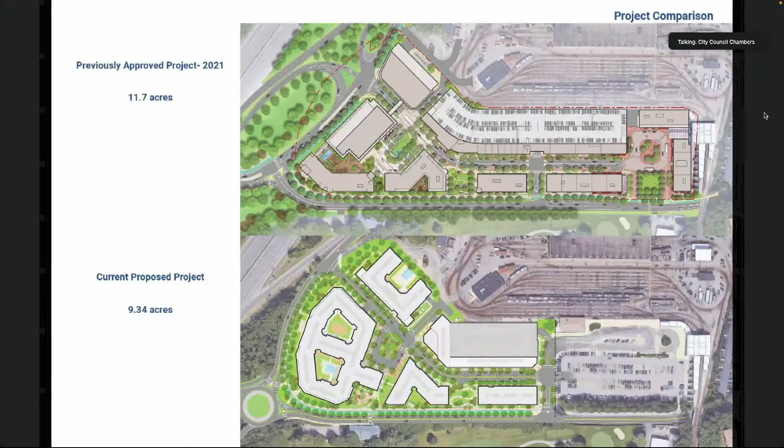I keep going wrong direction. I think I got one more slide. Hold on. There we go.

But we did hear from the community and some councilors that we're currently in a situation in the schools where Williams is under-enrolled, and we're looking to bring more students into the community, and we have acquiesced by bringing in more 2-3 bedrooms than we typically would. So those are just the general metrics of the property in comparison to the last property. I'm going to turn it over now to Rob Adams from Halvorson, who will take you through site access circulation.

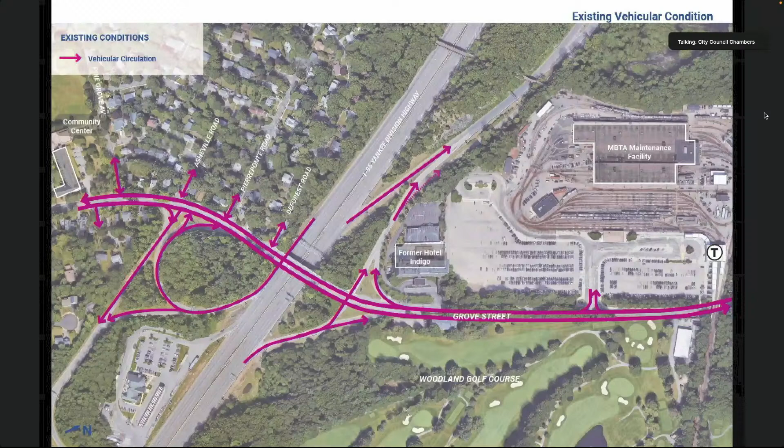So we'll talk about transportation, both vehicular and pedestrian, and then Randy will talk a little bit more granularly about some of the transportation numbers. So this diagram that you see on screen, north is to the right. Obviously, Grove Street runs kind of horizontally across the page, Riverside's at the top, Community Center, Lower Falls to the left. This will be the orientation for all the graphics you see tonight. So this is just a diagram of the existing vehicular circulation as it exists on site. The proposed, sorry, seems to be epidemic tonight.

So the proposed vehicular circulation is shown now on the screen. Introduces two roundabouts, one to the north and one to the south of I-95, maintains Grove Street in its two-way existence, improves the on-ramp to a two-way road that runs east-west from the Rotary to Main Street, and then ultimately connects to the off-ramp of I-95, or the CD road as it's called. And so we won't get into too much detail, but this is the general proposed vehicular circulation.

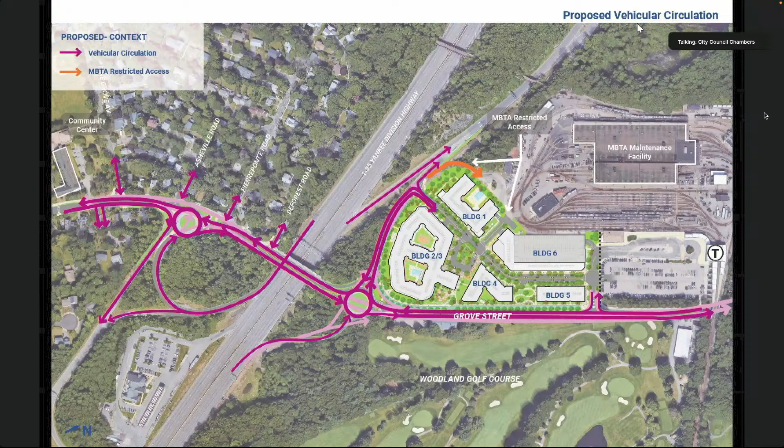The pedestrian circulation, I think, has some more meat on the bones as far as public benefits. Two really important moves. One is the continuous pedestrian circulation from the MBTA site all the way southerly to the community center in a clean and contiguous improved pedestrian corridor. As well as a new pedestrian link to the west to Riverside Park and ultimately the MWRA site. And then obviously some connections from Grove Street onto our site and maintaining all the existing pedestrian connections that exist down in the Lower Falls area.

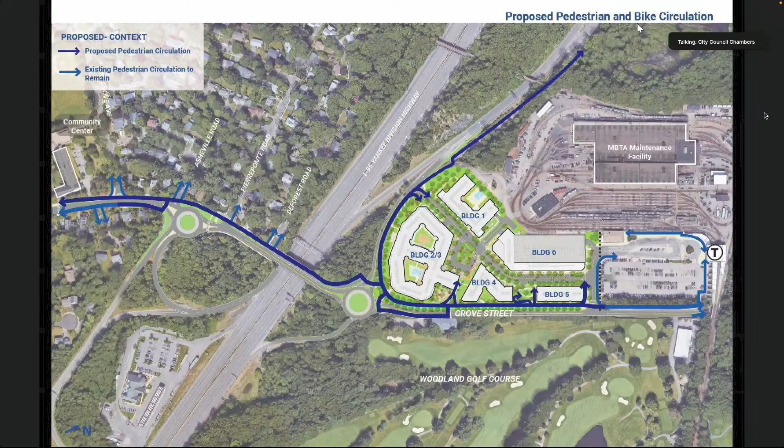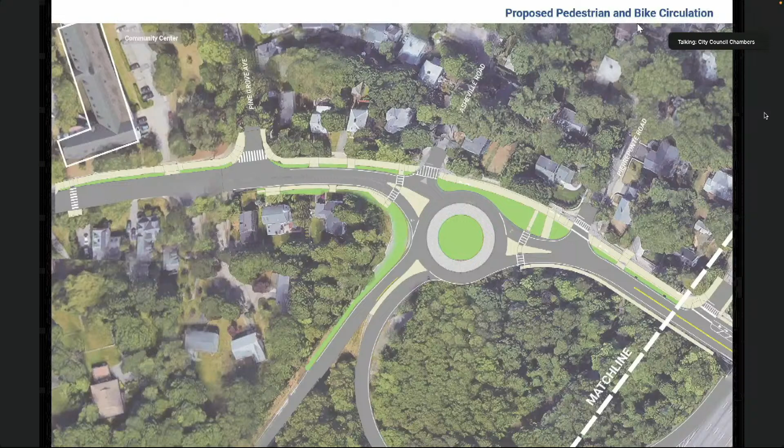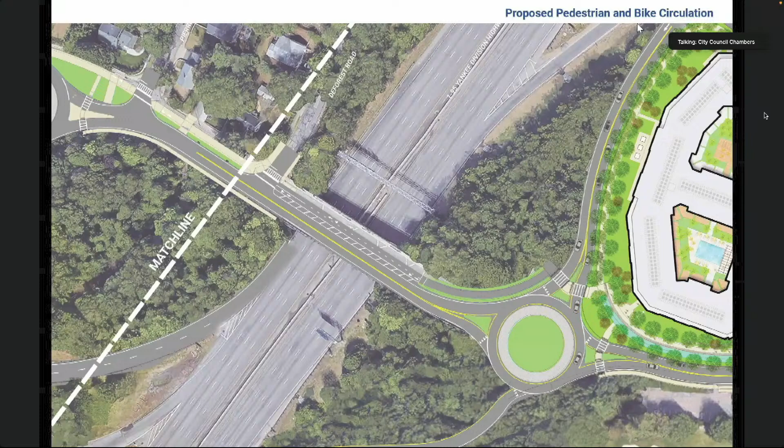Diving a little bit deeper into those pedestrian improvements to the south. So starting at the community center, a new and improved public sidewalk along that western edge of Grove Street, continuing all the way to the bridge overpass. At the bridge overpass, it turns into a protected bike lane, bike facility, as well as a pedestrian sidewalk. And then once you cross, if you're headed northerly, cross the bridge, as you approach the project site, there becomes a protected median, which allows a pedestrian to cross one lane of traffic, find shelter, and then cross the other crosswalk into our site.

And so provides that clean and safe pedestrian connection. On our site, once you get onto the Riverside property itself, heading north on Grove Street, you'll see in more detail, but a separated bike facility and pedestrian sidewalk. As you head west from that roundabout, a shared multi-use path, which ultimately, as I said, connects all the way down to the MWRA site and the regional trail network.

Within our site, we have clean and clear pedestrian corridors, sidewalks, streetscapes along Main Street and some of the secondary streets, as well as some primary connections from Grove Street down into Main Street itself. Just to note, there's a little bit of grade change between Grove Street and Main Street, about 25 feet at its apex, more or less, at that set of stairs between buildings 2 and 3.

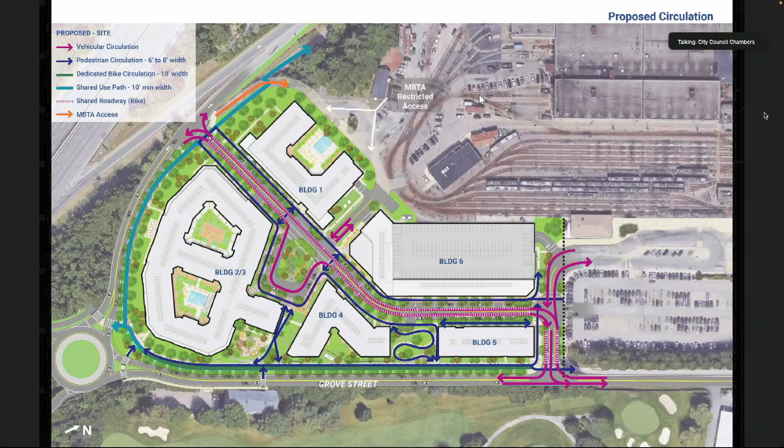And I think that is it for my part. Randy will talk a little bit more granularly about the transportation numbers, and then I'll be back to talk about public realm.

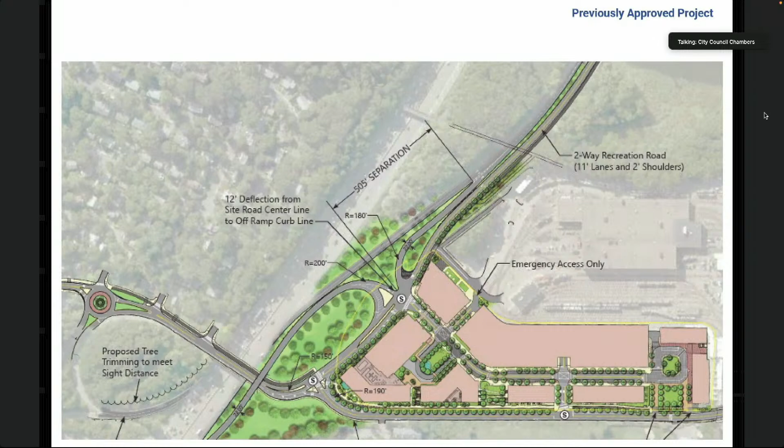So this is just a site plan that shows the proposed project, and it shows basically that we're only developing the western portion of the site. As you come in the driveway today, everything to the left would be redeveloped, but the surface parking for the T to the right will remain as is. We are proposing that access remain as it is, and it would be unsignalized under this plan.

We are also proposing on the far western side of the site a T-type intersection on the access ramp to CD Road. It would become a T-type intersection with stop control on Main Street, which is the internal roadway. And today, if you're headed on the access road to the CD road, or the on-ramp, I guess I call it, it's one way in a northbound direction.

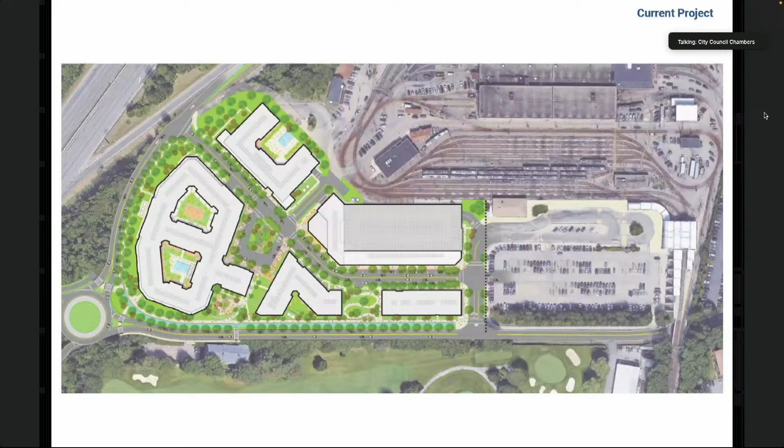Under this proposal, it becomes two-way between Main Street and Grove Street. So you would be allowed to make a left-hand turn out of that intersection and go back to Grove Street under this plan.

So this is a broader view, and it shows the site plan as it did before, but we are also showing what we're proposing at the two 128 ramp terminals with Grove Street. We're proposing modern day roundabouts at both, single lane roundabouts, and that will serve a number of purposes. One, it improves operations at those intersections today.

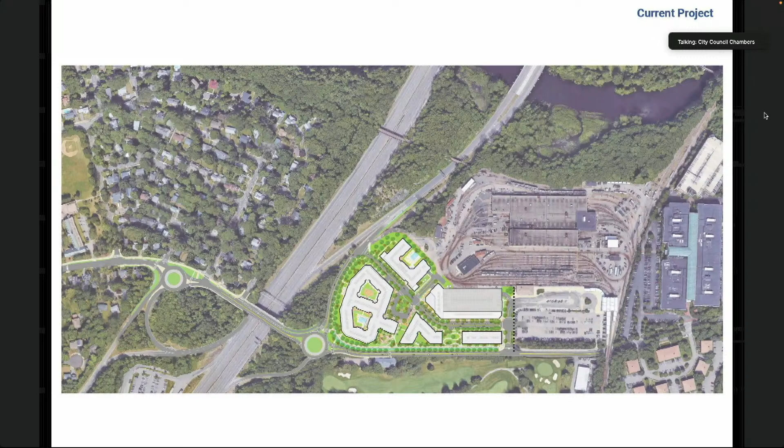It will provide traffic calming, it will provide enhanced safety, and it really is helpful in creating a much better pedestrian and bicycle environment because it slows all traffic down. All movements have to go slow through the roundabouts. So the volume in this area will be much slower than it is. When you couple that with the improvements being proposed to the infrastructure of bike and peds, it really will make an impact.

I'm sorry, I'm just getting coached by my team here.

So my last slide is simple. I wanted to demonstrate to you what the queues would be on the approaches to the roundabouts and also on the driveways as you exit the site. I didn't tell you before, I meant to, but the level of service that we see in the future build condition during both the morning and afternoon critical commuter peak hour periods is a level of service A at the southbound roundabout, which is the best it can be.

That's during the worst time, the commuter peak hour in the afternoon, which is our busiest. And then it's a level of service B at the northbound roundabout during those two commuter peak hour periods. So really good operations with this project in place and the plan for improvements.

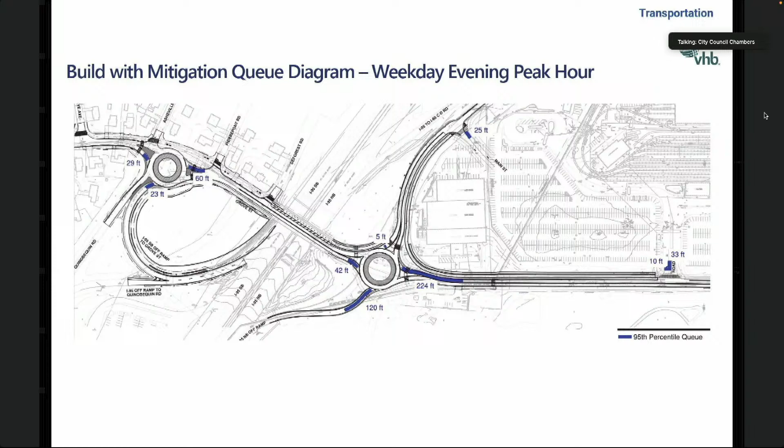Okay, Rob Adams again. I'm going to drill down a little bit more into the site design, specifically some of the numbers. This is really brief. Smaller site, but our percentages for open space, beneficial open space, exceed the percentages from the prior approved project. There's really a network that we've created. We'll talk about it in a little bit more detail. There's a lot to talk about. Again, I'm going to stay at a very high level.

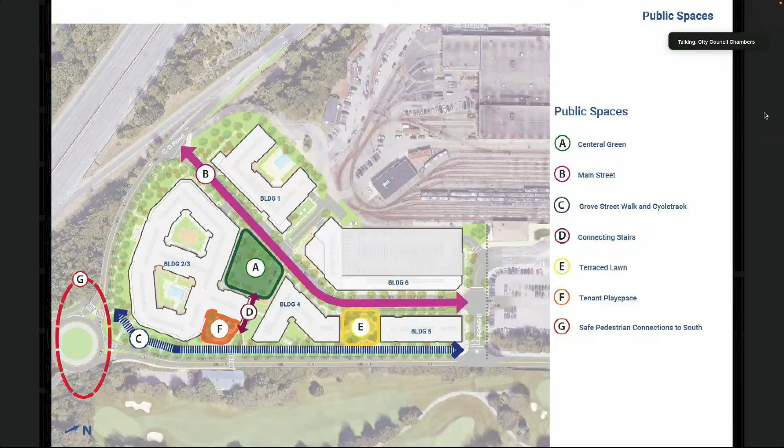Primary focus, as we talked about, is positive pedestrian circulation, making this a walkable, livable environment, creating some key open space moments along that, providing some multimodal transportation opportunities. And as Randy talked about, the improvements at the right of way. So we'll go through each one of these spaces and give you just a little bit of flavor as to what they are.

At the end, we've made some developments in the last couple of weeks, and we'll get to some of the work that we've been doing most recently as well. So the central green, as we've seen in the slide earlier, that A area is really the heart of the development.

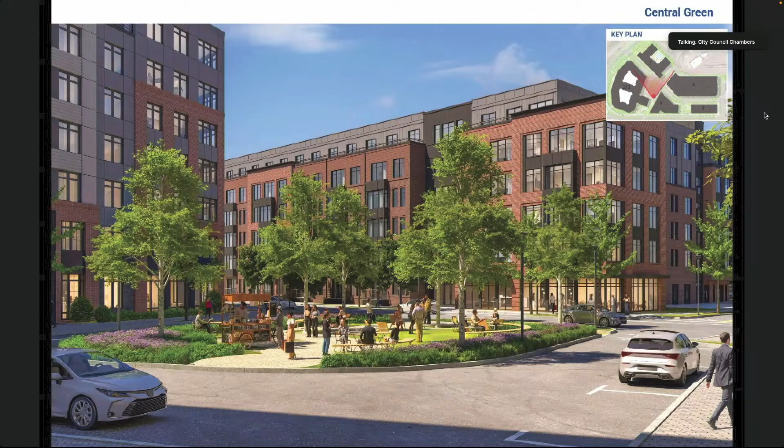A passive green open space with residential, and you'll see in a little bit some new retail and civic space being introduced at the ground level to really help activate this place as a programmable kind of active area.

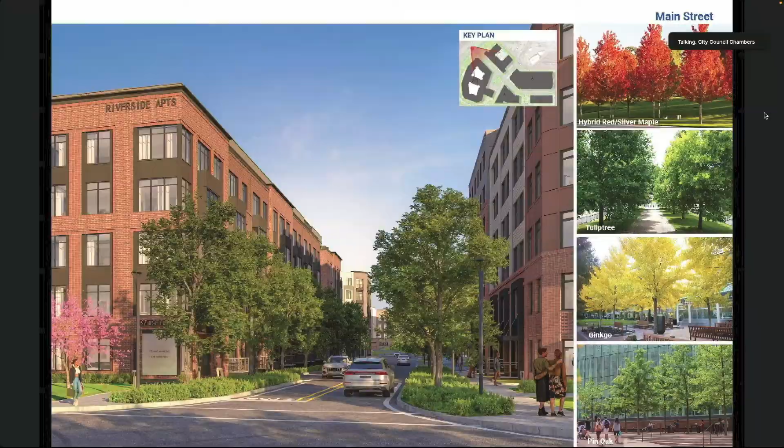Main Street itself, focusing again on pedestrian realm, clear open sidewalks, treeways along the back of curb, large shade trees, as we've all experienced this summer. Healthy shade trees are such a benefit to the community and to the individuals. And so really looking at native species, a variety of species, multiple colors, providing a variety of plants to reduce any sort of monoculture.

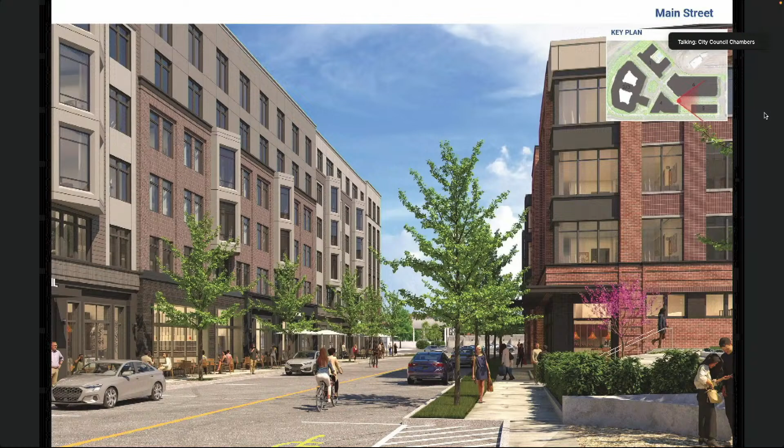Also thinking about the ground floor retail experience, you'll see in some of these slides where we've located ground floor retail and created ample cafe zones and ample sidewalk to support the spill out of ground floor uses along Main Street. And as you'll see on that side, that central green area in a little bit.

Grove Street itself, there's been a lot of conversation about that. Grove Street will remain in its existing width, doing some restriping to help organize that, providing a treeway along the back of curb, a protected cycle track on the other side of the treeway, buffer, and then a pedestrian corridor, which then provides us an ample planted buffer up to building 4 and 5 along Grove Street.

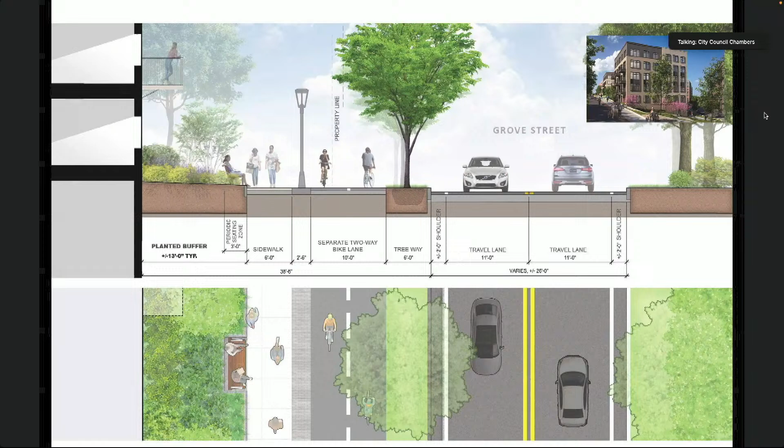Lastly, 2 areas that we want to talk about a little bit more, the open spaces that we identified in the first plan, and we'll talk about again a little bit more later. On the left is a tenant-provided play space, kind of in the crux there of building 2 and 3 and 4 up at the higher Grove Street elevation. Grade change falls away a little bit, and so we're able to, I think, nicely nestle this play space into that area, provide a little bit of grade change so it feels separated from Grove Street, provide adequate fencing and enclosures, but also provide a great amenity for the community.

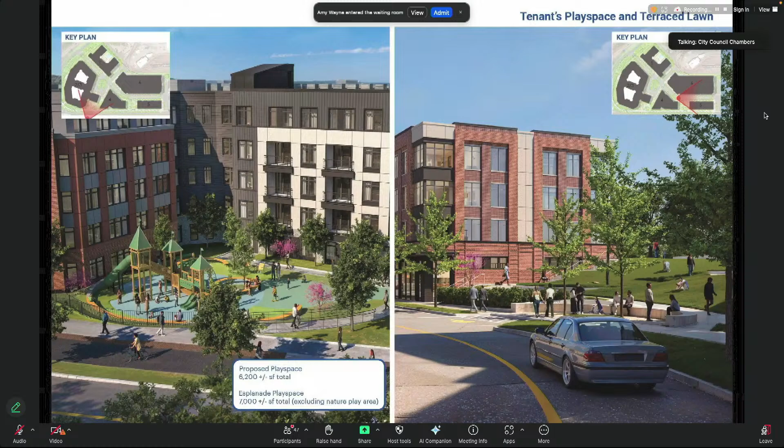Not only when we all talk about community, the tenants and the residents of this place will soon be future community, and so providing that amenity for the tenants of this development.

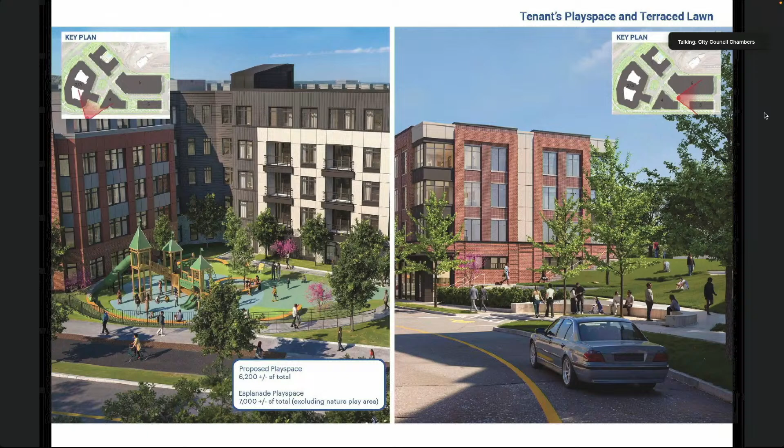On the right, you can see one of the other areas of these pocket parks or right-size social spaces that we've created. There's, as mentioned, the 25-ish foot grade change that moves from Grove Street on the upper right down to Main Street on the left. And so creating a series of lawn terraces to create some social spaces with some more active seating just off the back of the sidewalks, both at Main Street and at Grove Street.

Lastly, we'd be remiss if we didn't talk about it. We are very conscious of it. All of our efforts are around best practices around water management. And so protecting natural resources, obviously a comprehensive soil management plan, erosion plan, but also water quality methods, water management methods that are about water quality as well as quantity. And Rich Holworth is here from VHB to talk about that if there's any more details and any more questions.

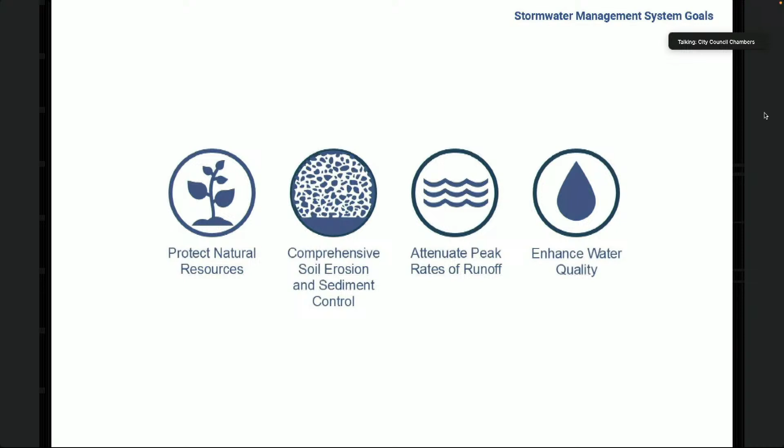So with that, I'll turn it over to Michael. And at the very end, we can share some of the work that we've done in the last couple of weeks to respond to some of the recent meetings and peer review comments. Thank you.

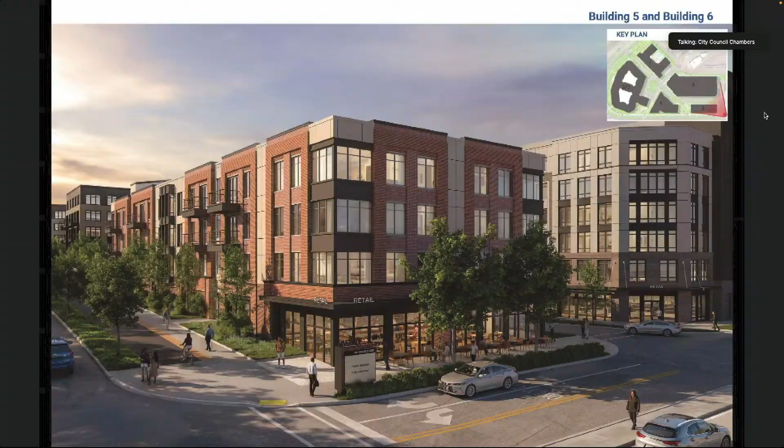Thank you, Rob. My name is Michael Lawson. I'm a principal with Manoa Wasco Architects and Planners, and we specialize in multifamily mixed-use developments throughout the Northeast. And I'm really excited to present the architecture of Riverside to you all tonight. A lot of the themes that you're going to see in terms of the architecture also flow through the open spaces and the site design that we've come up with.

And you heard a lot about the pocket parks and the space making and the place making that we've created on site from Rob Adams. And you'll see here how we're then interacting and creating a cohesive new neighborhood for the site. So I'm going to be taking you around the site along Grove Street and then along our new Main Street as I show you new images and views of our proposed project.

So this is the entry into the project, closest to the train station, the MBTA station, and how you would mainly enter into the site. Here you can see that on the ground floor, we've activated the buildings with extensive layers of retail that have really large open storefront areas. And this happens along the Main Street as you get a glimpse of that as you turn around, but also it was very important to activate this corner as you come into the site.

As you go up Grove Street, we have, as I said before, these pockets of green space and pockets of public open space that kind of create a really great rhythm as we go up and down Grove Street and up and down Main Street. And you can see how the building architecture interacts with the improved pedestrian and bicycle improvements along Grove Street, as well as the different architectural features that we have on the buildings.

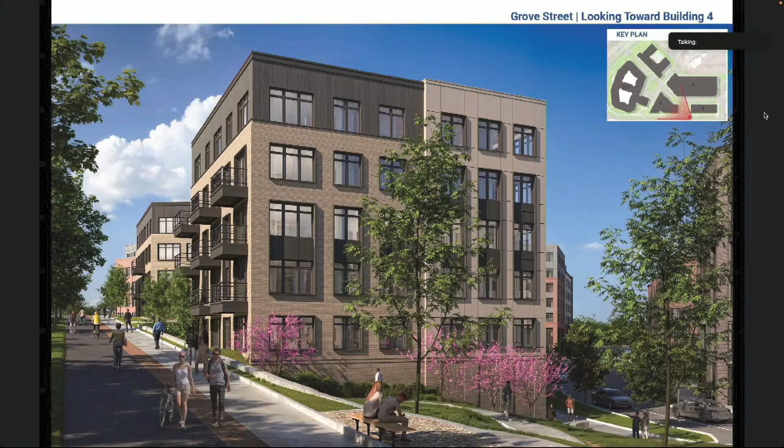We've really created and looked at how the building architecture cohesively and consistently is brought together with each of the uniquely designed buildings. And this includes a palette of materials that includes brick, different varieties of fiber cement panel, architectural storefront, and some areas where we really accent the windows with balconies and bay windows as well. Here you can see that we've created entry points. This is at the roundabout, as well as different breaks in the building to break up the massing of the building with step backs in different locations.

Mr. Lawson, I've had a request, and this is for everyone, that if and when it's relevant, if you can use your cursor to point to exactly where on the image you're talking about, it would help some people better understand the renderings. Thank you. Sure. I can try to include that as we go through.

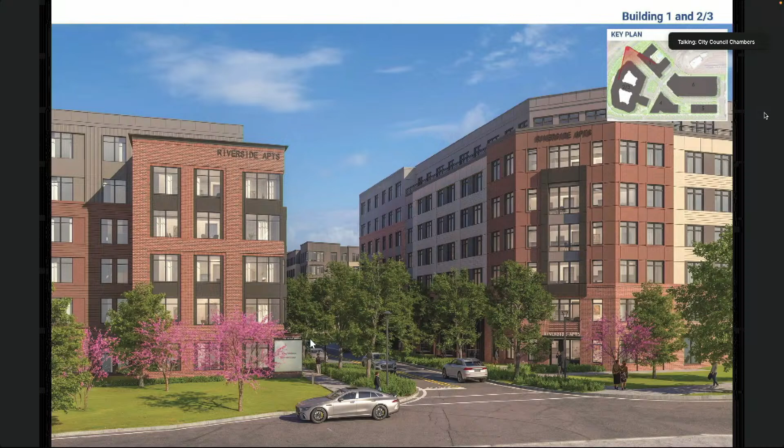Here, this is the opposite entry off of the new two-way road that we've created on the one side of the project. And here you can see that we've really looked to chamfer the building, create an area where we have a box bay and a monumental entry into the site. On each side, you see different compatible materials. You see on the one side that we have brick located here, as well as step backs on either side that transitions in material and lightness of color of the palette.

As we proceed down Main Street, this is where you really get a sense of how we're going and creating a sense of place for this new neighborhood. And you can see the different architectural elements, including the traditional brick detailing and corbelling that's located on the sides of the buildings, as well as the bay windows and other architectural vernacular that we've created in the community.

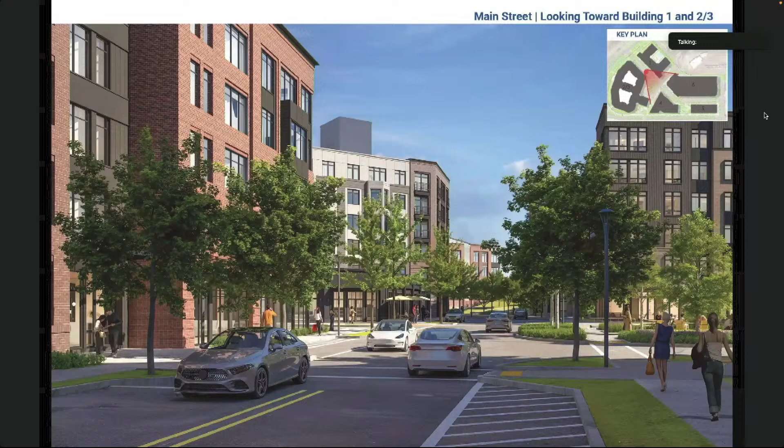Going down the street here, you see we're further down into Main Street. We're at the heart of the new neighborhood where we have retail fronting on each of the sides. We have lobby and amenity spaces that are along Building 4, located over here, that create activity at this streetscape. And then as Rob Adams had discussed, we have areas of cafe dining that interact with the retail spaces that are occurring on the inside of each of the buildings.

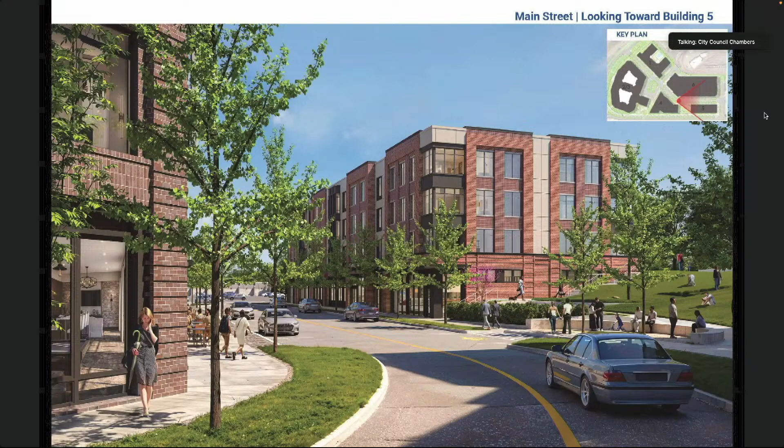And here you can see all the different brick detailing that we have on the different buildings, really accenting and creating this really great architectural vernacular as we consistently move through the areas and see the pocket parks and how they interact with the building architecture. And that leads us back to the original image that we had, really taking in the idea of the green spaces, the architecture that we've created on each of the different buildings, as well as the different massings that we've created as you proceed down Main Street with the different step backs and different breaking of the building with different materials.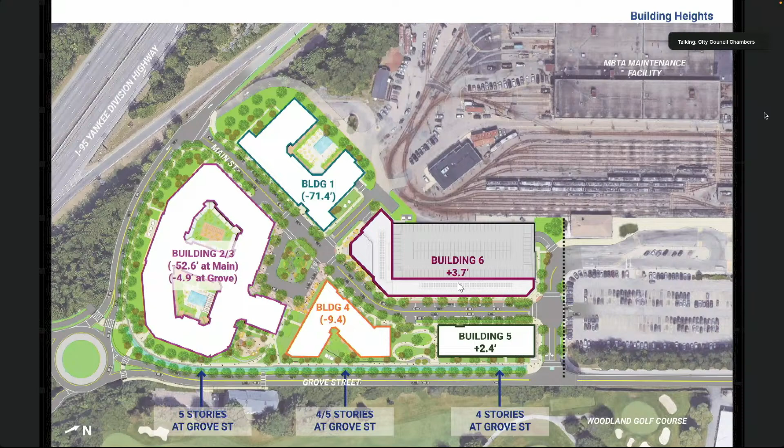One of the last things that I just wanted to bring up here is how we're incorporating sustainability items into this project. And one of the things that Newton has done is they've incorporated Passive House into the buildings that you build here. And some of the improvements and benefits of that is enhanced thermal comfort, quality assurance that performance is as designed, reduced carbon emissions, and better sound isolation.

The building envelope and the systems that we put in these buildings is really brought to a higher performance in terms of minimizing the thermal bridging, right-sizing the heating and cooling, and really controlling the building moisture. And overall, the site, there is a real steadfast effort to improve stormwater mitigation, create shaded outdoor spaces, really designed with native plantings, and have multimodal connections and bicycle parking throughout the project.

At this point, I'll hand it back over to Rob Adams, and he'll talk about some of the public realm updates that we have for the project. Thank you.

Evening. One last piece. We've been hard at work. I think we've had some really good input from the community, stakeholders, peer reviewers, Town of Newton. And so we've made some progress, I think, in the last 2 weeks. And so we want to share some of the updates we've made towards improving the project, listening to the stakeholders,

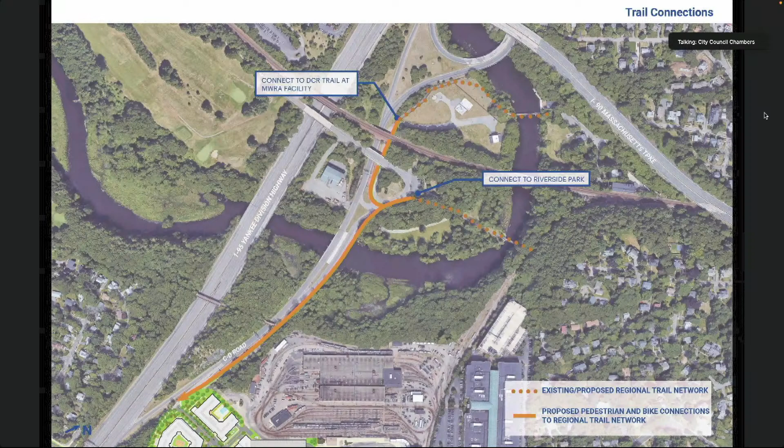I can use my cursor, sorry. Thank you. It's a little lag time, but we'll figure it out.

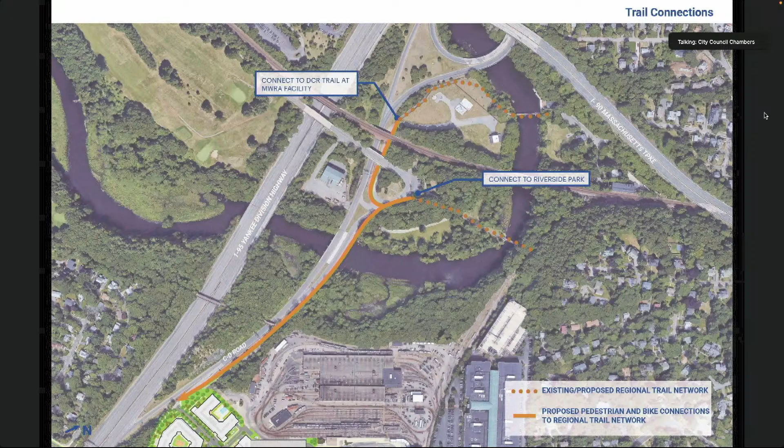So making that connection along the existing roadway edge and connecting to Riverside Park and its trail network, and then ultimately connecting up to the MWRA property and the larger regional trail network. We wish that our project was of a scale that we could provide every scale of open space and public realm possible. We can't do that. We're creating some nice right size pedestrian realm on our project site. And we feel like making this linkage to the larger regional and large scale public realm open space is a real benefit as part of this project.

The other part we've been working on, and we've been getting some comments from the peer reviewer group. I want to highlight some of the work that we've had already done and some of the changes that we've made recently. So this is really the core of the project, the main buildings, Main Street, Grove Street, and the open spaces. The ground floor uses, you can see the pink represents amenity space or lobby space. The blue is retail, the yellow is actual housing units, and then the gray is back of house or circulation.

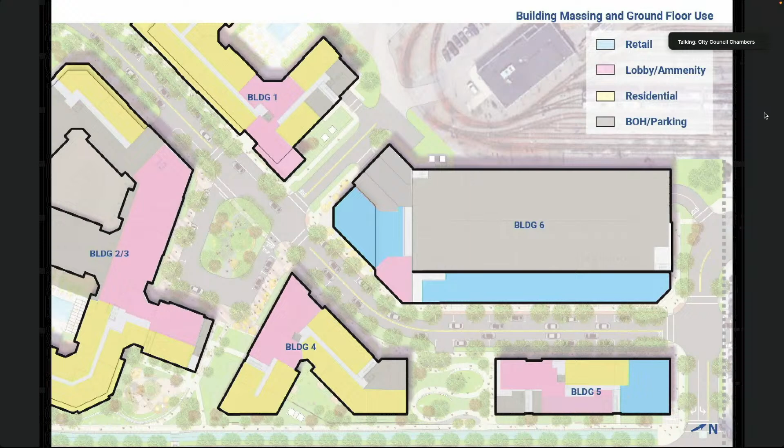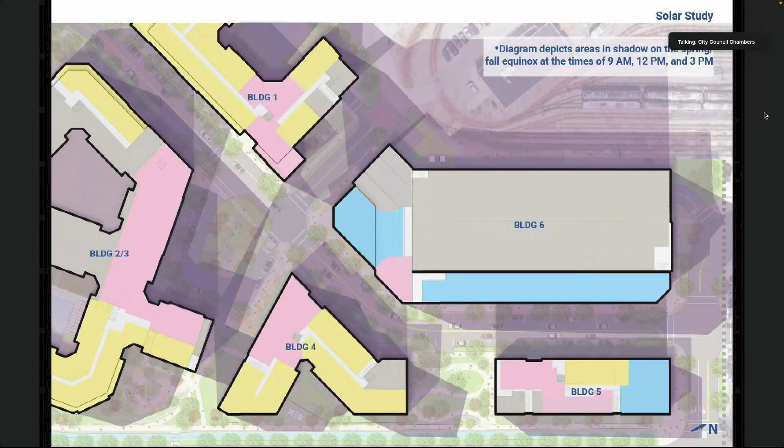We wanted to think, and it has brought some concerns around solar gain. New England is a cool environment, and so we want to maximize those areas that have more solar gain than others. The darker the purple on this plan, the more shadow it receives. This represents the equinox. So this happens twice a year. Obviously, we didn't show the winter because that has cast shadows at my house from here. And so you can see the darker purple are areas that get a lot of shadow. South is to the left, and so all the north sides of the building are primarily where the shadows are.

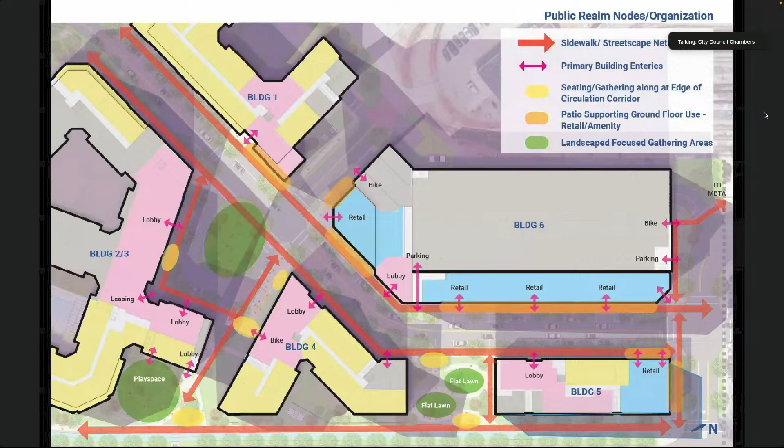And so thinking about the shadows, thinking about circulation corridors, the generator of users where incidental interaction happens, building entrances, thinking about all those things, we started to layer in where our open spaces were. And so they were important to us because they did maximize a lot of those open space and solar gain areas. They were also places along the back of sidewalks, expanded public realm, expanded public streetscapes to create those opportunities for people to gather.

I will say that we did recognize that there was room for improvements. And so one of the things that we've done recently is that central green area, we've actually shifted this vehicular circulation to the left about 8 to 10 feet, put the vehicles in the shadow, they don't care, and created a bigger sun area on that right side of the plan. I'll use my pointer. In this orange area.

So along building 4, we've increased the sidewalk width from 22-ish, 24-ish feet to approximately 30 plus feet. We've also relocated some ground floor retail from one of the other buildings around to this corner and introduced a civic and community space of about 2,000 square feet. So once a plaza that could be arguably criticized as not being very active now has a much larger sun streetscape and plaza, which is supporting retail and ground floor civic and community space.

And then the last thing I think that's important to recognize is a lot of these spaces do become a series of events. And so some comments and criticisms around the connections between Grove Street and Main Street. And we feel like if you think about Hansel and Gretel and the trail of crumbs, like this idea that the play space up on Grove Street is one enticer, starting to introduce some public art into those stairs that move down to Main Street, this new civic and community space, expanded streetscape and retail. And then now this civic green becomes activated. So really starting to lead the users and the pedestrians from the higher level of Grove Street down into the inner sanctum, so to speak, of the space.

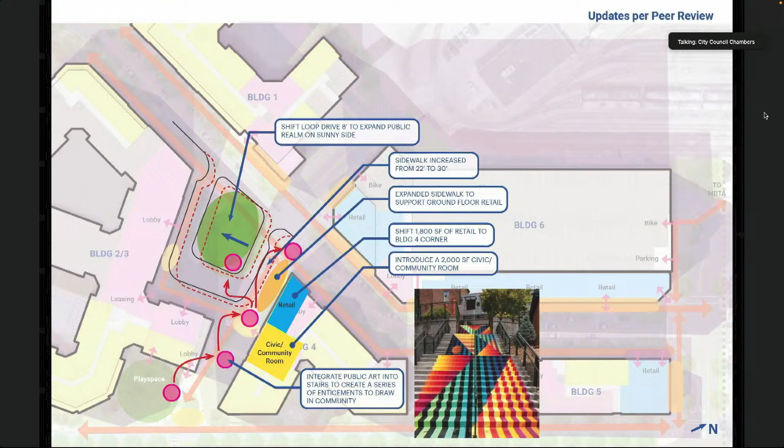And so we feel like some really positive changes, appreciate the comments that NBBJ and others have made, community has made around some of these opportunities to improve the project. And I do want to point out real quickly, in one of the diagrams, just as clarity, garage circulation, there's access to the garage on the far north. Mouse is gone, but it showed up on the other plan. One point to note, there is garage access below building 2, which is located right here off of Main Street. That wasn't noted before, just one of the slides was in error. So anyway, that is a little bit of summary of the work we've been doing to date. I think some really positive improvements, and I'll turn it back to Steve.

Thank you. Thanks, Rob. So that completes our presentation. I just want to mention, Madam Chair, that we're very appreciative both to the planning department and the peer review team for getting us their comments very quickly, which enabled us to actually start working, knowing we have a tight time frame on this. So that was very, very much appreciated. So that's it. We're happy to answer any questions.

Thank you very much. We're going to go to the planning department next. In the meantime, I would like to welcome Pam Wright and Rena Getz, 2 other councilors who have joined us on Zoom. Planning. I'm just going to stop sharing your computer screen. That will help. Thank you, Madam Chair. Let me just pull up my presentation. Hopefully everyone can see that.

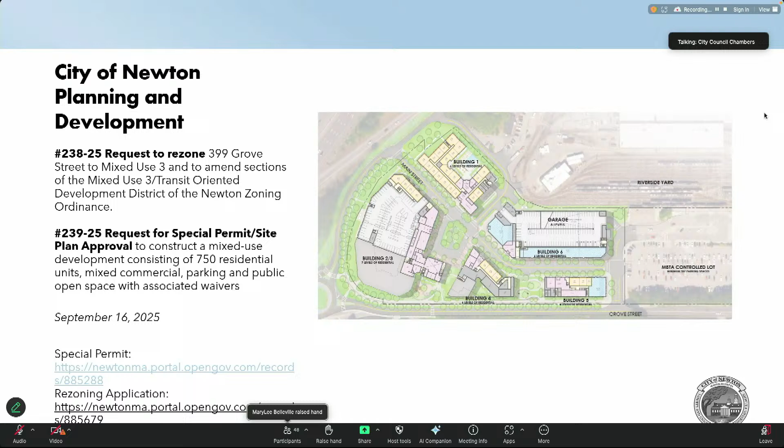Yes. Good evening. My name is Kat Kemet. I'm Deputy Chief Planner in the current planning part of the planning department. We have two petitions associated with this project. The first is 238-25, a request to rezone 399 Grove Street to mixed use 3. The second is 239-25, a special permit to construct a mixed use development consisting of 750 residential units, mixed commercial and retail space, parking, and public open space with associated waivers.

The site includes land from 3 different parcels: 0, 355, and 399 Grove Street. 355 Grove Street is a parcel owned by the MBTA and is zoned partially as MU3 and partially as BU2. 399 Grove Street is in the BU5 zoning district, which is the site of the former Hotel Indigo. And 0 Grove Street is in the MU3 zone and is part of the Hotel Indigo site.

The site abuts the Charles River and Riverside Station, a golf course, and residential uses, the Riverside Office Park to the east, and I-95. Something to note here that we heard a bit about earlier is that the development site is reduced in size from what was previously approved in 2020 and 2021. This version of the project does not include a portion of the MBTA surface parking lot. The majority of the interior of the site is fairly level and lies below the surrounding grade of Grove Street, but there is a steep drop off along portions of Grove Street down to the interior of the site.

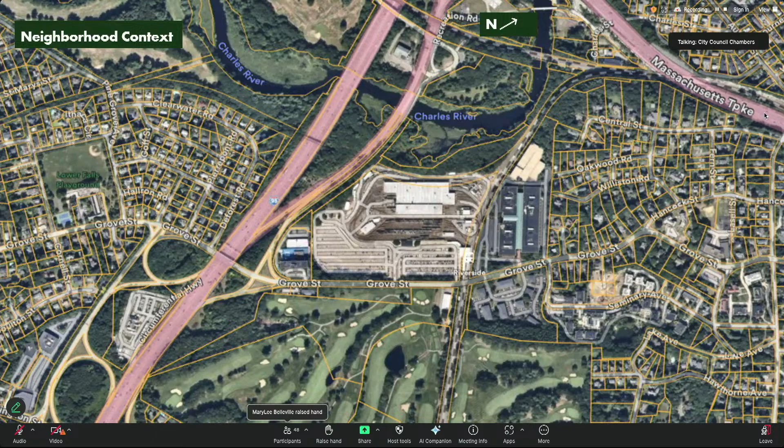This is a project that has a long history, as we've heard, so I'll keep the background here brief, but there have been a few iterations of this project over the years. In 2020, a mixed-use project was approved by City Council on the site, which rezoned certain portions of the site to mixed-use 3. This plan included housing, a hotel, retail, office space, and parking. More recently, there was an amendment in 2021 to that plan, which included changes to the height, density, and footprint of several buildings on the development.

It included 370,000 square feet of lab and office use, 550 residential units, and 21,980 square feet of retail and commercial use. It also included commitments for offsite mitigation and other neighborhood improvements.

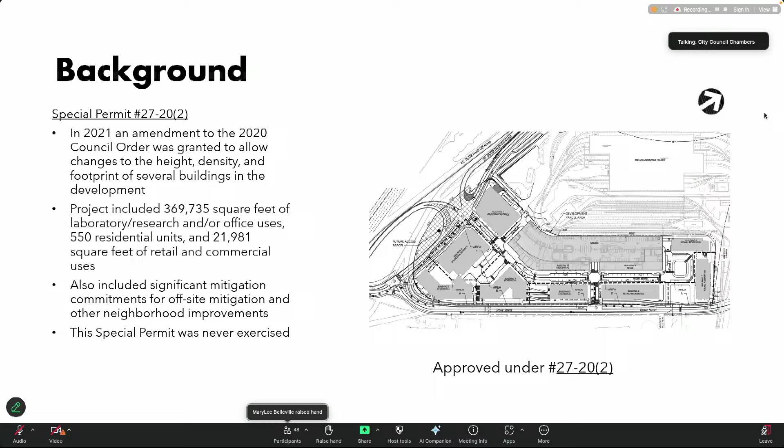The petitioner is now requesting a special permit for a revised project, which includes a mixed-use development with 750 units in 6 buildings. The project is roughly 890,000 gross square feet with about 20,000 square feet of retail and commercial space and 1,119 new parking stalls. The project will comply with the city's inclusionary zoning ordinance, which will require 151 units of deed-restricted affordable housing.

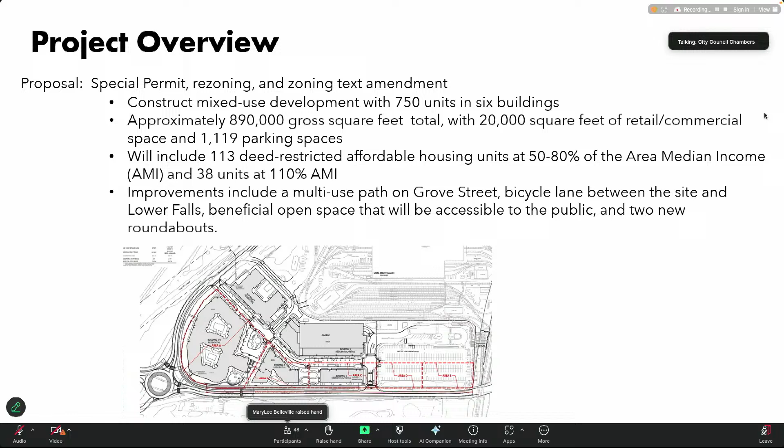The petitioner is also proposing a multi-use path on Grove Street, a bicycle lane between the site connecting to Lower Falls, beneficial open space that will be accessible to the public, and 2 roundabouts to mitigate traffic impacts in the area. There are a few different elements of zoning relief required. The planning memo goes into this in great detail, but I'll do a little overview here.

The project needs dimensional relief, including a special permit for buildings that are over 20,000 square feet of gross floor area. It also needs relief for the height. The tallest building proposed is 83 feet and 7 stories tall. For parking, relief is needed to reduce the amount of parking required for commercial uses and to allow a 1.25 ratio for residential parking. In total, there's a waiver of 400 parking stalls that is requested.

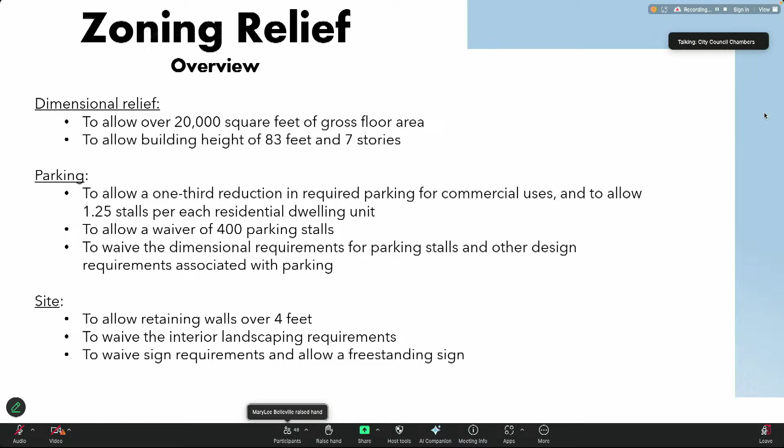There's also a few elements of relief related to parking, including some stalls that are substandard size to allow restricted end stalls and a few other parking and drive aisle related reliefs. There's also relief requested for retaining walls over 4 feet, interior landscaping and lighting waivers, and to allow a freestanding sign. The petitioner requests to rezone one parcel, 399 Grove Street, from BU5 to MU3.

They've also requested text amendments for the MU3 zone, some of which are necessary to allow for the proposed design here. The full list of text changes is in the memo, but a highlight is that it will reduce the lot area per dwelling unit from 800 square feet down to 520 square feet. It will reduce the lot area in MU3 from 11 acres to 9. It will reduce the amount of required beneficial open space from 42,450 to 30,000. And it will reduce the maximum allowed height by special permit down from 170 feet to 95 feet.

There's also some changes to the uses in MU3. Some that are currently allowed will now be prohibited if this is approved. That includes government offices and uses, laboratories, and general office use. Some uses will be added conversely. So the added would be for-profit educational use, restaurants with over 50 seats, and elderly housing with services.

The city has worked with several of our on-call consultants to review aspects of the project. They're all here tonight except for our consultant, Camoin, who reviewed the fiscal impact analysis. Camoin did submit their memo and noted that the estimates and methodology used in the fiscal impact was reasonable in their assessment. They asked for a few points of clarification that are fairly minor, so we expect the petitioner to respond to those points at a later date.

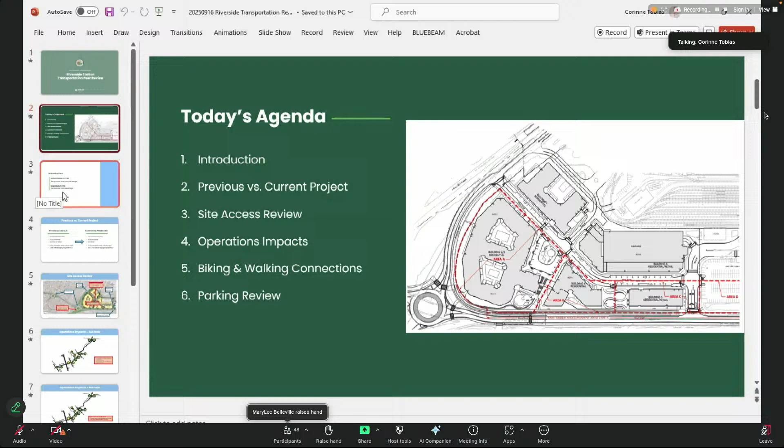Hi, and I apologize, everyone. I was muted earlier. I couldn't unmute, but I'm Corinne Tobias, and I'm joining Sergio virtually this evening. Thank you. Sergio already did the introductions, but here's our little introduction slide as well. Sure.

So this is just really brief, you've seen this enough, but basically the site overall has been reduced. There's been additional residential units added, but the large office component has been reduced and has been eliminated. So that results in a great reduction in number of trips, which, as we'll see in a couple of slides, affects the offsite impacts of the proposed development.

So review of the site access: as mentioned previously, the I-95 interchange is proposed to have one-lane roundabouts for each of the southbound and northbound ramps. And the existing site driveway, based on the predicted traffic volumes, will remain unsignalized. For operations and safety reasons, it will be limited to right turn entry from either the north or the east, and traffic coming from the southwest will... oh, there we go. And so traffic coming from the west will use the entry for eastbound access, which is proposed on the I-95 northbound on-ramp.

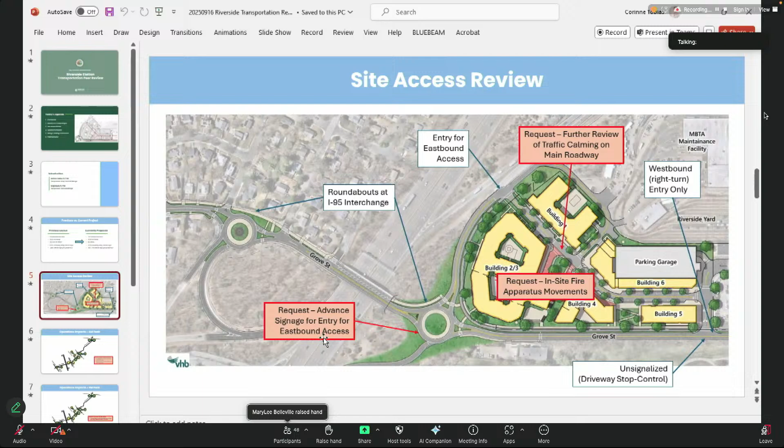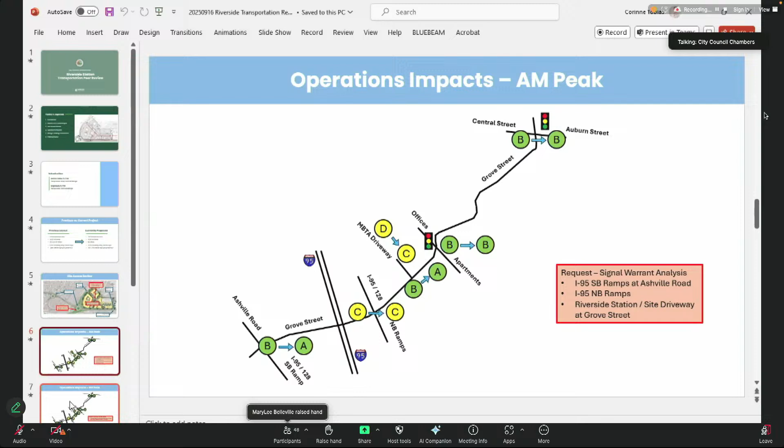So going on to the next slide, just a brief recap. Those little letters are, as previously mentioned, the level of service letter grades. A is low delay and F would be pretty much longer delay, like an average of around a minute. So because of the new site's reduced size, the levels of service for the weekday AM and PM peak hours, even during game nights, or event nights where there's sporting events in Boston that would see increased use of the Riverside Transit Station, are not anticipated to be significantly impacted.

However, we would like to request additional information regarding the Saturday midday traffic volumes, just because sometimes there's events going on in Boston that would attract a lot of transit use into the city.

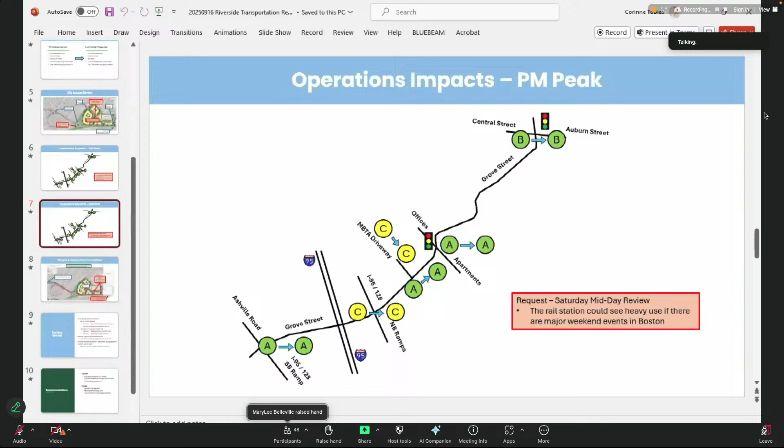So obviously, considering the site is at the transit station, it's not just motor vehicles that we've reviewed access for. Pedestrian and bicycle access to and from this site is also a major component, especially connecting it to the adjacent transit station. So the proponent has proposed basically a combination of either a shared use path or on-road separated bicycle lanes along Grove Street and the new access along the south. The dark red and blue segments are the proposed bicyclist connections.

However, although the applicant is able to provide accommodations to the northeast of this site, we believe that there is on-site ability to provide even closer bicycle connections to the actual transit station, as shown by the cursor, and request some review of that.

It's also noted, if you can see in the lower right corner, the previous design plans had proposed a mid-block pedestrian crossing. And we were just confirming if this was still proposed, which is recommended, and if so, what sort of improvement options, potentially including flashing beacons, would be provided for users of that crosswalk.

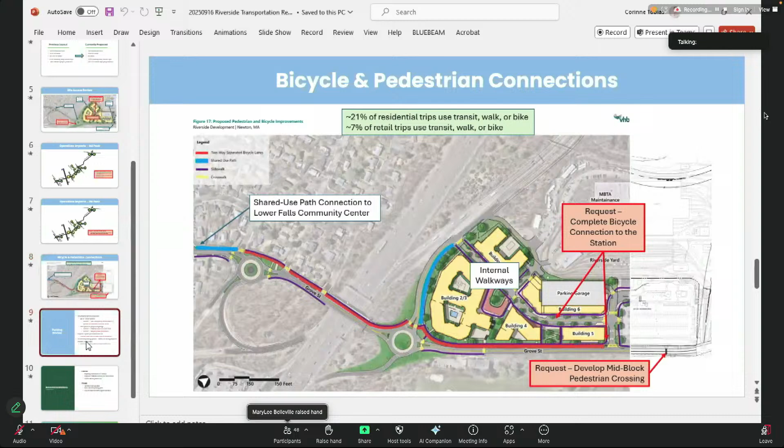We also reviewed parking spaces. So in addition to the surface lot MBTA parking spaces that aren't basically being touched, there's the 1,119 proposed parking spaces either in the garage or on street adjacent to the buildings. So for the on-street spaces, there was some discussion of it in the TIS, the Transportation Impact Study. We just wanted to confirm the use, occupancy, and location of spaces for deliveries to the proposed businesses and for rideshare services.

The parking garage has proposed 980 spaces. And although there was some information provided in the plans, we just want to request further information and discussion of the parking layout on each floor of the garage, as well as confirming bicycle parking locations, considering that approximately 8 or 9% of trips would be made via bicycle or walking.

And also, for the number of spaces per residential unit, on average, the previous discussion of the waiver mentioned 1.25 spaces per residential unit. Of course, that would mean most of the residential units would allocate 1 space per residence. So I just wanted to confirm that this is made clear to residents to maintain the transit, bicycle and walking heavy component of the site.

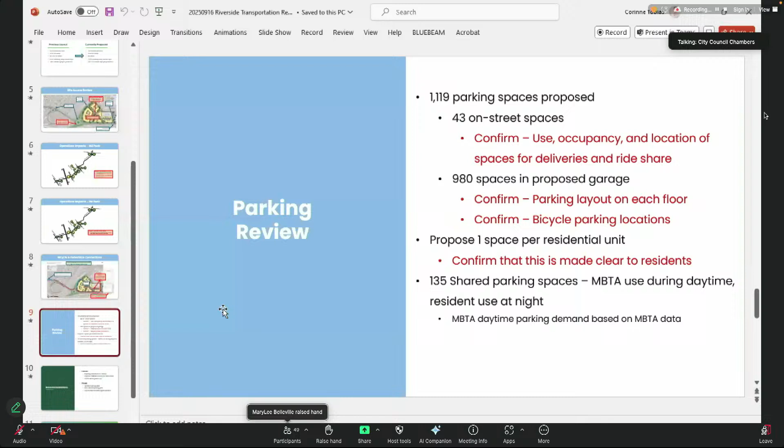So overall, our recommendations and requests for further information that we'll work further with the applicant on in the coming weeks: we'd like to evaluate the bicycling connection to the transit station, improve the proposed mid-block crossing on Grove Street to the northeast of the site, and introduce some additional traffic calming measures within the site, since walkability is going to be a large component and we would want to reduce speeding within the site. Also we would like to request updated signage, more detailed parking plans, and the volume data to confirm that the traffic signal warrants are not met, and that the roundabouts are a more feasible option.

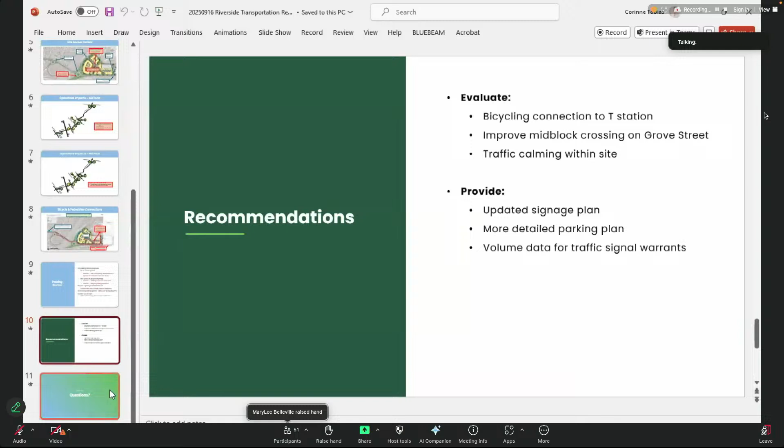So I'm not sure if we're taking questions at this time or if we'll be waiting for later, but that concludes our presentation for now. I did also want to say, we generally reviewed the traffic study volumes and methodology and agreed with their methodology and the data that was presented. We just had a couple additional questions that we needed some clarification on, and those recommendations are based on our review of the site plan.

Thank you. Yeah, we're going to do questions all at the end. I think people are keeping track of them. So we'll move on with the next peer reviewer. Thank you. Urban design, is that right? Yeah, I want to check to make sure that my microphone is working. We seem to be having trouble all night. Can everybody hear me? Okay, good.

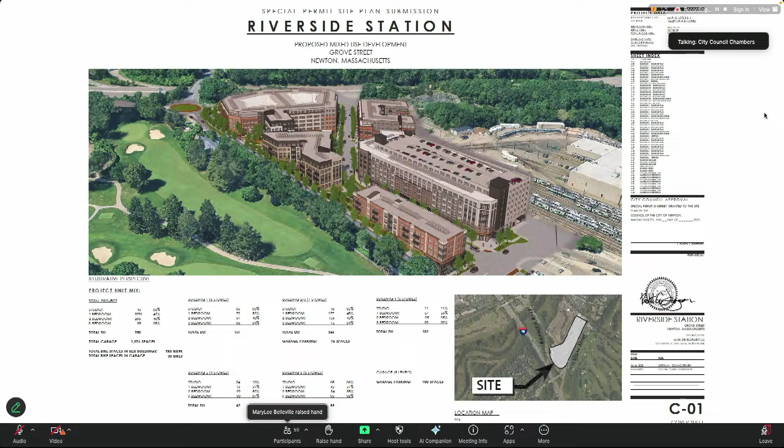Thanks, Kat. So I just want to start by saying we really appreciate the responses that have already been given by the development group, that they've responded to some of the comments we made about a week ago. So Kat, if you don't mind going to the next slide. Could you identify yourself first? Oh, sorry. Alan Mountjoy with NBBJ, looking at urban design issues. So other than what I just saw tonight, we've been responding to the package that was submitted from mid-July. That's what the memo is based on. So I'm going to try to both summarize what I said in the memo and then react in real time to what I've already seen tonight in terms of some of the changes that I'm very gratified to see were made.

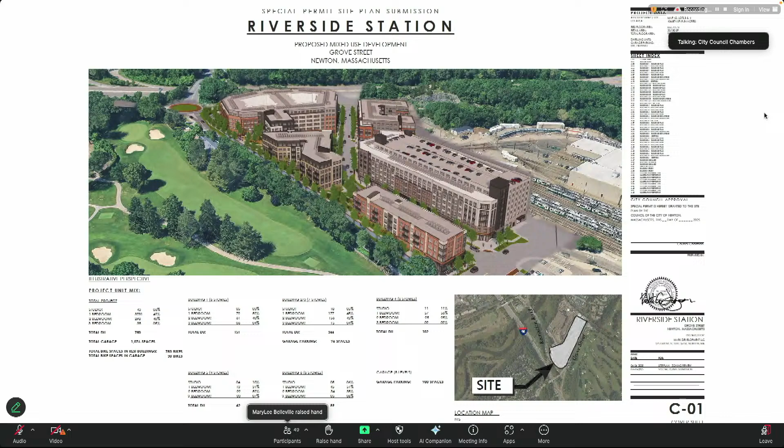This is the current proposal. I think we don't need to belabor the facts on all of that. I did want to, on the next slide, show that there were many, I say, aspirational aspects to the prior projects. Those included a much closer connection of transit to the actual mixed use, where one could really imagine oneself arriving on a train and walking into a plaza and being able to catch a shuttle bus or catch dinner or get a coffee. Those were very, I think, wonderful ideas about what a transit-oriented community should look like.

In addition, in the latest iteration, it had mixed use, truly mixed use in the sense of office users that would animate the space during the daytime. And I know that we're not trying to make the perfect the enemy of the good here, but there were a lot of things that were good about this project that have been somewhat diminished by the reduction in the size of it. And we wanted to acknowledge that.

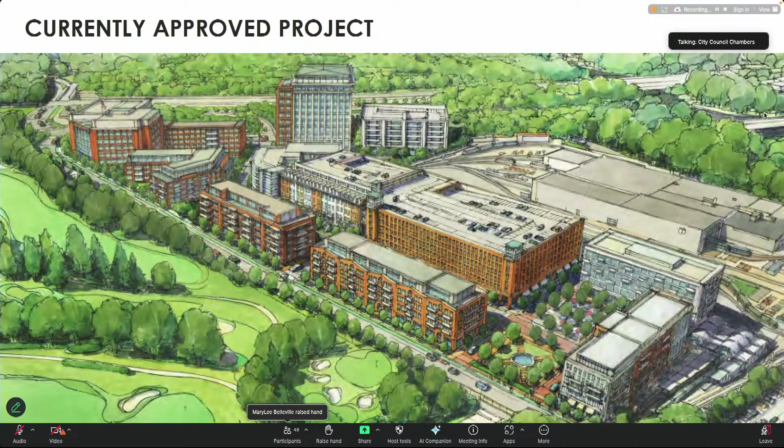If you go to the next slide, the original proposal had sort of 3 open spaces, one of which was mixed use adjacent to office users and residential, then the sort of terrace space, and then the real civic plaza that was really meant to be where transit took place, with a very public-facing aspect to it. So I think we all feel perhaps a little bit of loss of that.

So we want to make sure that we maintain as much as possible in this new project, because we don't know what the MBTA is going to eventually do. This may or may never be realized as a full connection all the way to the transit station. Maybe it will. Likewise, we don't have a lot of information about what the DCR is going to do with their site at Riverside. So we're working a little bit in the dark on 2 of the edges of this site, but I wanted to make sure that this project goes as far as it can to make improvements that don't depend so much on later phases, creating a good project for the interim.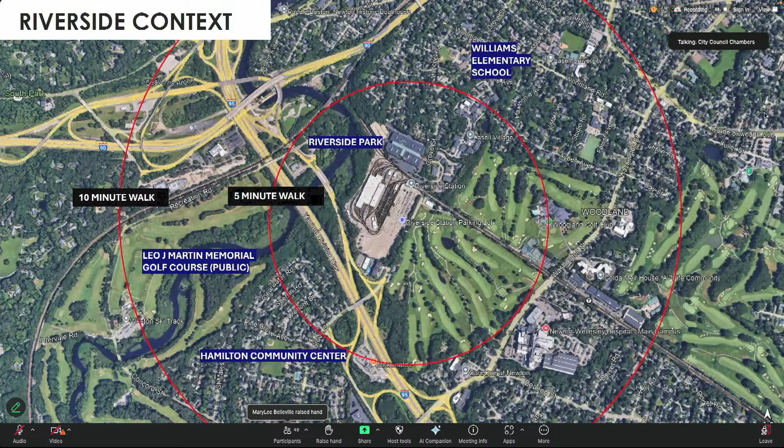Just pointing out some of the features that are within an easy 5-minute walk. Riverside Park is a 5-minute walk. That's the red line. It's a little hard to see. Williams Elementary School is about a 5-minute walk. Hamilton Community Center is about a 5-minute walk. And then the Leo Martin Golf Course, which, by the way, is a great place to go cross-country skiing in the wintertime if you've never done it, is also a great asset to this location. So we want to make sure that those were not being lost. If you go to the next slide, Kat.

So one of the things that I wanted to point out was there's a really tight spot under the MBTA train. And while one could imagine bicycling along on a multi-use path, you suddenly find yourself under this overpass with a signal pole or a pole right in the middle of the sidewalk. If we're really trying to encourage new students to go to the elementary school and people to come to this great new place, perhaps we should make it a little bit safer for them to do that by enhancing the pedestrian connections, even if the MBTA has no intention of doing them in the meantime.

Next slide, please. Likewise, and again, I'm very gratified to see that the development group has thought about extending pedestrian accommodations to Riverside Park. I would like to see more about how that's done, given that it's also an on-ramp to the freeway and it's got sort of an unfinished recreation road that DCR may or may never actually be able to fix up. So to the extent possible, if this project can make those improvements, that would be fantastic.

Next slide, please. So moving on to the open spaces, and I think there's been a lot of discussion about this, and I appreciate the changes that have been made to these two spaces, because I think it's important to note that while these spaces represent great assets to those who might live here, they are very hard to see from Grove Street. You really can't see it. At 25 feet is probably slightly optimistic.

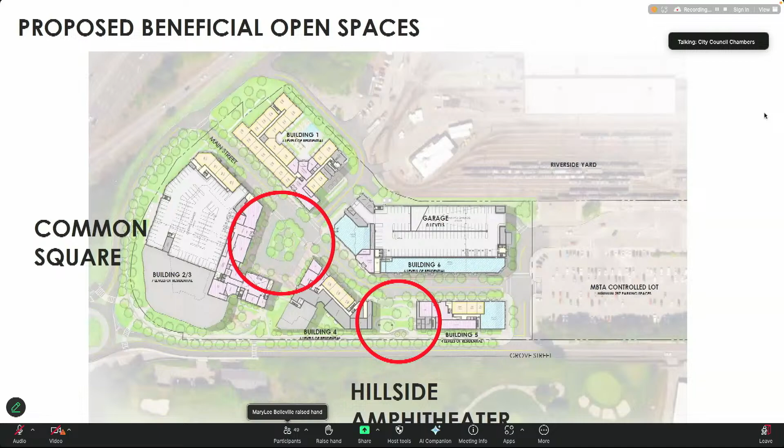I think it's slightly more like 30 feet down, almost 2 full stories of commercial uses down to get to Main Street. Go to the next slide. You can see there's a great rise on Grove Street, and according to my calculations, which may be incorrect, it's about 25 to 30 feet of difference in height between those two spaces at the highest.

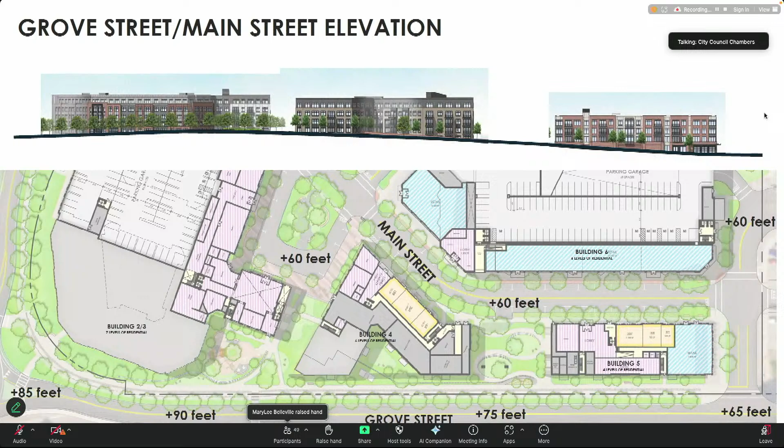So very important to create those connections because it's difficult for people to get out of the site. It's in a bit of a hole, and it's very hard for people to go by to see what's going on inside the site. So those are two things that I think a very important aspect of this site is the grade changes. Go to the next slide.

You can see this is what I blew up so you could sort of get the experiential effect of the fact that it is 2 full stories of drop from Grove Street down to the Civic Plaza that's down here. So I appreciate, and again, I applaud the landscape architects for thinking about ways to make this an attractive and perhaps eloquent way of getting down to the site and a much more fun way of getting up, because 2 flights of stairs, 2 stories is not an easy thing, even if there's an elevator.

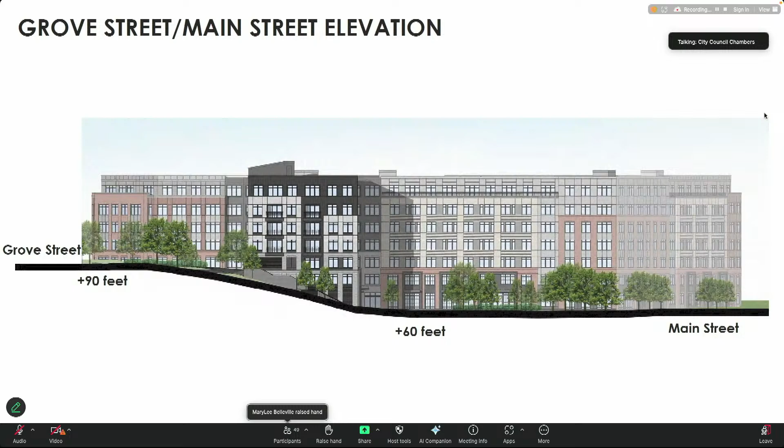So next slide shows a little bit about, and again, I'm reacting here to the newer slide that I just saw, which shows a little bit more animation, if you will, to this space. And we very much appreciate the kinds of new uses that the developer is proposing adjacent to the site, because it felt very, very passive and not particularly active. And while it is called beneficial open space, a lot of it had to do with parking and drop off and delivery, which may or may not be considered beneficial open space in terms of passive uses.

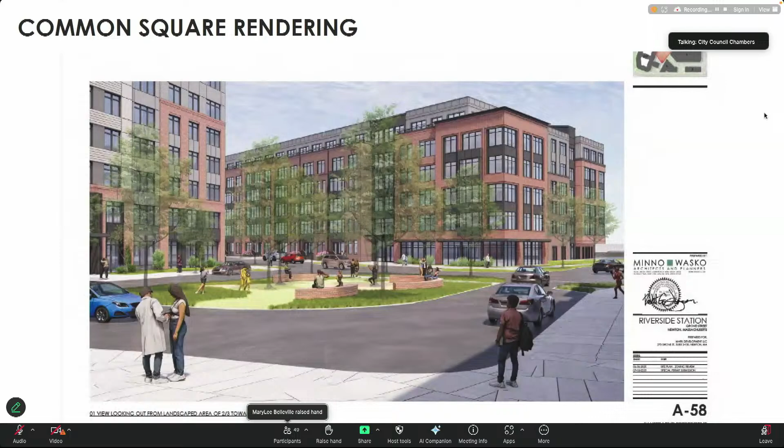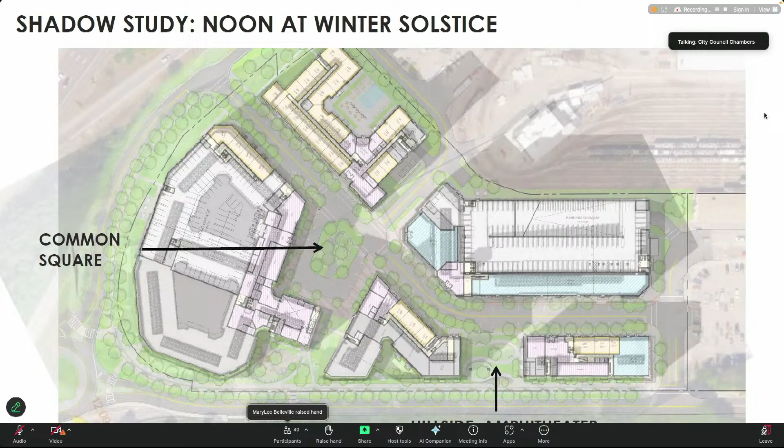Again, I appreciate the new renderings of the way this terraced amphitheater works. I think it looks more convincing now than it does in this particular rendering. And we asked them specifically about how that space might be programmed. Calling it an amphitheater might be a little bit difficult to envision for some people. So we, again, applaud them for making improvements to what this space is like and also describing how Main Street will feel. Go to the next slide.

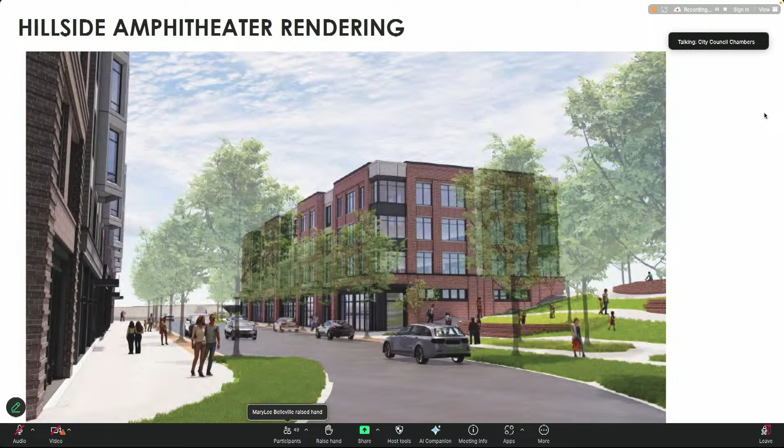The last thing I wanted to comment on was the architecture, and this slide was slightly improved from the last one, but this view of the site does sort of raise the question of mixed use 3 zoning, which has a 20,000 square foot maximum limit on building size. And this building is now called 2 and 3. And the reason for that is that it's actually 2 buildings put together, and it is very large. And it is perhaps very imposing on this corner. I think that we continue to want to see ways in which this doesn't feel like such a large blockade of entrance to the site. And we're looking forward to ways in which that might seem a little bit more welcoming than it does today.

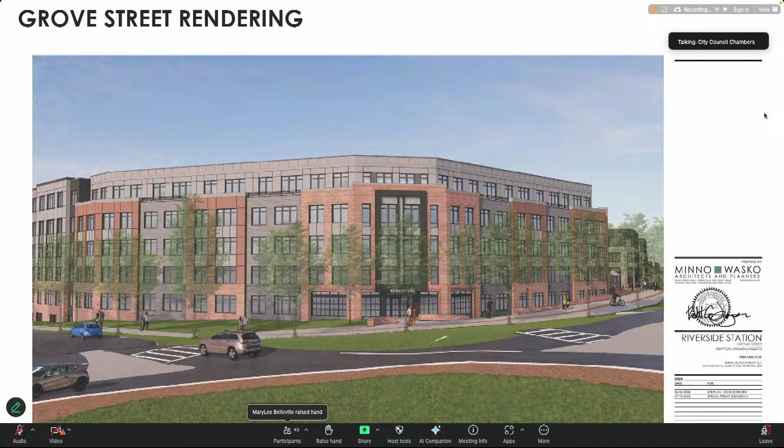And lastly, Building 6, which of course is by its very nature a very big building because of the parking lot and is considerably smaller than it was in previous plans. I think what we're asking for here is maybe a little bit more thought about how the facade might feel a little bit less monolithic, although it will not be experienced in this way because it's mostly seen tangentially on Grove Street.

Just sort of a random comment in my mind is, while the garage entrance is clearly stated on the right-hand side, I'm a little unsure about where the garage entrance comes out on the left-hand side, and if it could arrive at this newly animated common space, that might be a good way to further animate that space by allowing people to come down the garage and walk out onto that space.

Lastly, I just wanted to comment on that view that I was just looking at. There's been some different images of what this looks like. I think it looks great as an entrance. I do question what they're looking at. If you stand out there today, it's not a very pleasant view of looking out over the parking lot.

Some of the images show a tree line, some street trees located on the other side of the street to screen the parking lot. But again, if the MBTA parking lot is going to look like that for the next 10 years until MBTA decides what to do with it, it seems to me that some interim improvements might go a long way towards making that a little bit nicer of an entrance to the site. That concludes my comments, Kat.

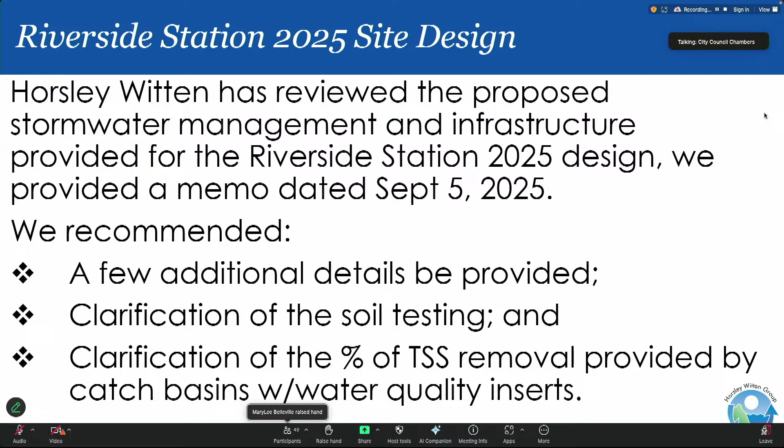The next slide, please. We also asked for clarification on how the garage roof runoff is managed and whether cars will be parked on the roof, which would add more sediment and grease and oils to the stormwater if that roof runoff is then being directed into the infiltration system, and it may need more water quality treatment prior to discharging and infiltrating into the aquifer. We recommend that a separate erosion control plan be provided to be included in the contractor's stormwater pollution prevention plan. Further clarification on snow removal.

There is a plan that shows where snow could be stockpiled, but there's a lot of trees in those areas. So it's not really clear how much snow can be contained on the site and what happens when it's a particularly large storm. There is a lot of roof area compared to roadway area, but that snow still needs to be put somewhere. Hopefully it will snow again someday, but maybe not soon.

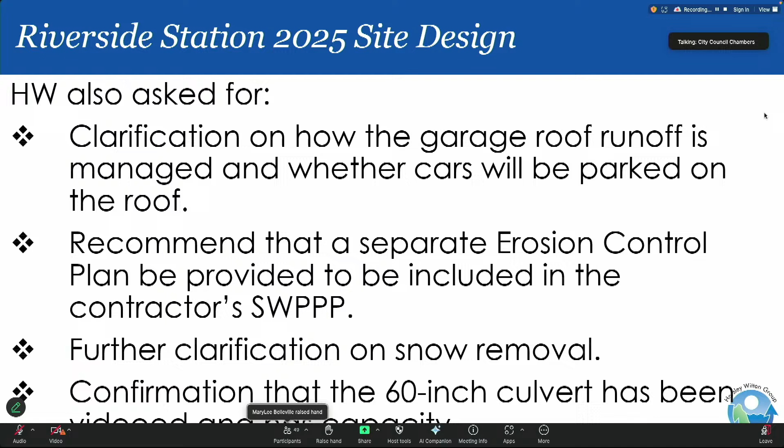And then confirmation on the 60-inch culvert. There is a large existing 60-inch culvert that crosses through the property, through the MBTA property, and discharges out to the Charles River. They will continue to discharge into that, just significantly reducing the direct flow from existing conditions, which have really no stormwater management happening. But it was going to be videoed, and I'm not sure if that happened or not previously.

We looked at the floodplain, and the site is not within the FEMA 100-year floodplain, so there's no further action that the applicant would need to do for that. The wastewater that's estimated to be generated and the water demand that will be required for this new development has been reduced over what was previously approved. For the environmental site report, that was the same information because it's existing site conditions, so we have no further comment on that. It was reviewed in 2021.

The proposed grading and utility layout appears reasonable for this site and the sloping that is occurring; it's relatively flat, and then the buildings themselves have different levels of getting out to the street, to Grove Street. And the construction management plan is very similar to the one that was previously approved. The Saturday hours have been reduced to be no later than 5:00 p.m., compared to the 7 p.m. that was approved previously. But besides that, it's basically the same. So that concludes our comments.

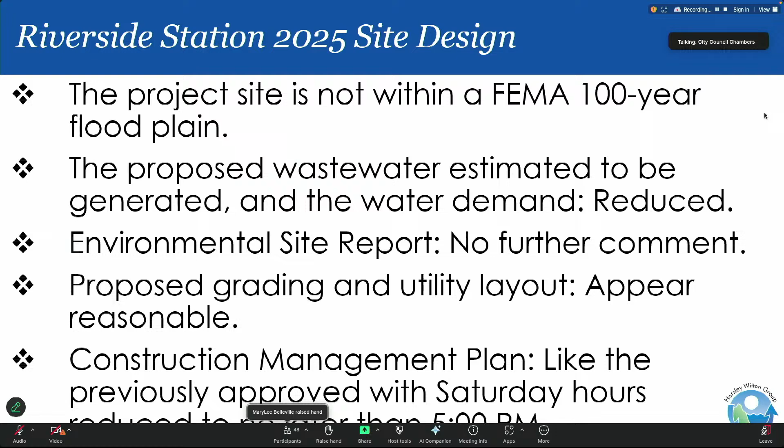Thank you very much. Is that the end of the peer reviews for tonight? And you said we'll hear from Camoin on fiscal another time, correct?

Can you repeat your question? Yes. I said, you mentioned that we'll hear from Camoin on fiscal at another time. Yes, that's correct. So we're all set. Okay, is there anything else from planning?

All right. So I'm going to ask Chair McCormick, would Planning and Development like to talk or ask questions now, or would you prefer to hear from the public first before you do that? I'm happy to do it whichever way you would like. I would think to hear from the public first would be fine. Just what I thought, but I wanted to give you the honor of going first if you wanted to.

Okay, we're going to open the public hearing. Just to let everyone know, we're going to keep the public hearing open. This is the first of what will be several meetings, 2, 3, not set in stone yet. If you're in the chamber and you're a member of the public who would like to make a comment or ask a question, can you raise your hand just so I get a sense of how many people there are? Okay, and the same on Zoom. I see one hand up. I'm just trying to get an understanding of how to time this.

If you're on Zoom, I'm not going to call on you right this second, but raise your hand if you want to make a comment. I'm going to give you another few seconds to think about that. And then some of you may pipe up later. Okay, not as many as I was worried about in terms of timing. So we're going to stick with the 3-minute limit. I'd rather hear from everybody, and I think we can do 3 minutes tonight. So first, I'll start with people in the chamber, just because you're sitting on these really uncomfortable seats. And then I will go to the hands up in the order on Zoom. So I see Mr. Chapman going to the microphone first.